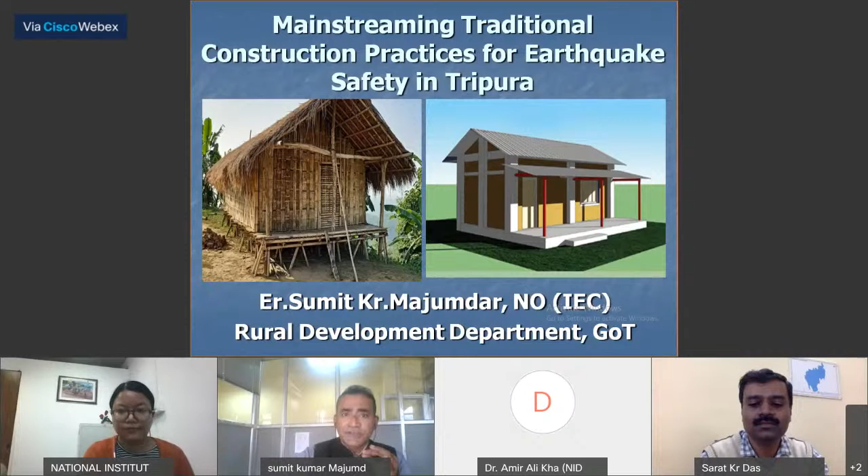Today, my topic is mainstreaming of traditional construction practices for earthquake safety in Tripura. This is the brief about my state. Tripura, excuse me, just.

Tripura is located in the southwest extreme corner of the northeast region with 10,492 square kilometers of geographical area, out of which about 60% is covered by hilly and forest lands. Tripura is a landlocked state surrounded by Bangladesh with an 856 kilometer international border, 53 kilometers with Assam, and 109 kilometers with Mizoram. And this is one of the smallest states in the country,

having a communication bottleneck and situated in a highly disaster-prone area under Zone 5, with a high population density, second highest in the northeastern region. Apart from all these constraints, Tripura is one of the best states in our country in rural development, health, education, and agriculture. Tripura lives in villages, as the rural population forms 82.94% of its total population of around 36 lakhs, as per census 2011. The average annual rainfall is 2200 mm.

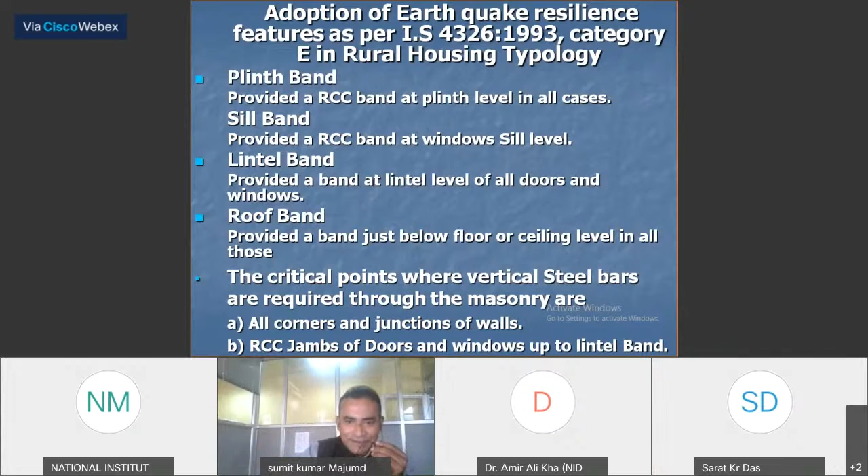So that stick will resist me and keep me from falling down. So in that case, one corner reinforcement will also give the same strength to that building. Because the bands are going through that corner reinforcement, it will give a good, resilient structure during the earthquake. So we have adopted this sort of technology over there.

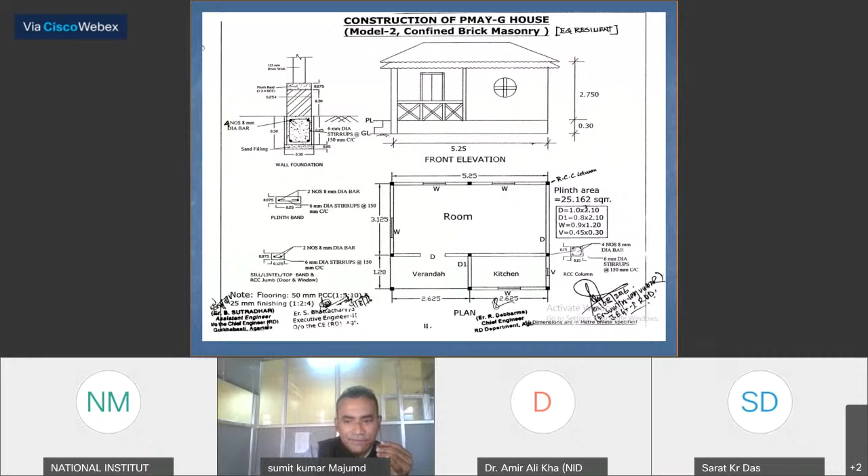We have developed this typology, PMAY-G houses, and we have circulated that. I have talked to you in this regard earlier. So we have circulated these designs. All 6 models have been circulated to the grassroots level people, and people are adopting these things. These are the designs. The plinth area of 25.162 square meter is within the permissible limit, and these are the structural designs we have circulated to them. These are all the models I have shown.

Surprisingly, we have seen ownership has been developed in PMAY-G, Pradhan Mantri Awas Yojana Gramin. In concept, people are using their own funds to develop better house construction. We have given only one reinforcement in the corner, but people are using RCC columns with at least four reinforcements, which is a good thing we have come to know.

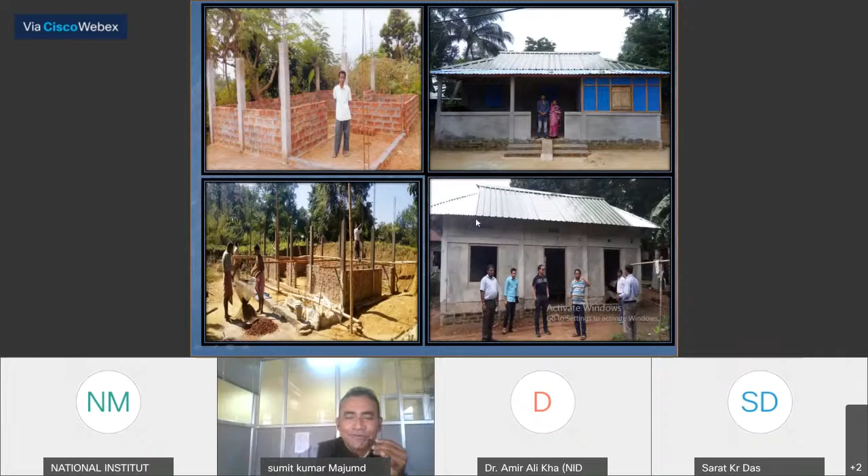And in our state, people are very much fond of bigger houses. And we cannot ignore that part either, because people used to stay in kacha houses in traditional practice. Now they are having a dream of staying in pakka houses. So bigger houses are very much in demand. So here also you can see the bands they have provided. And roofing is basically GCI roofing. You can see the transformation.

This is the earlier house of the beneficiary. See, kacha bamboo walls with mud up to window sill level. There are mud walls which are already broken. And now he is having a very pakka house. So I have given lots of examples of before and after. There is GCI sheet walling with simple wooden and bamboo pillars, and that was the earlier condition, and now he is having a pakka house. And this is also an example. You can see that condition, bamboo houses, now pakka houses.

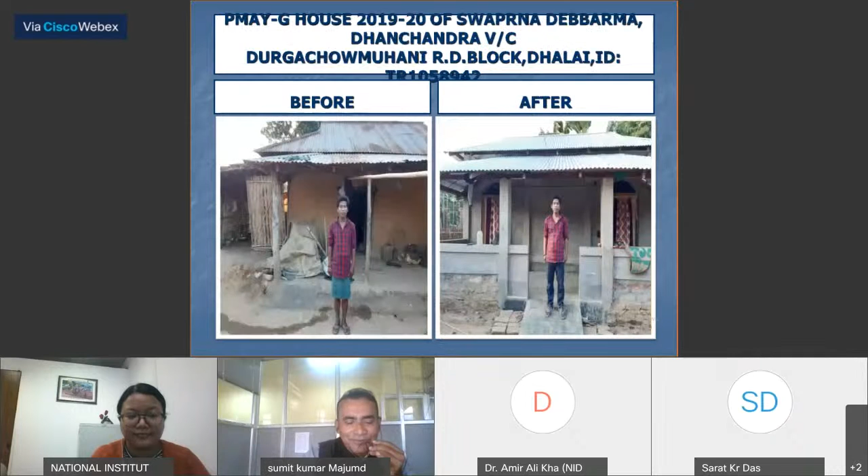That is a tong ghar. Primitive tribes used to stay in those tong ghar houses. Now they are staying in pakka houses. Here also, mud wall houses, you can see. Now he's having a pakka house. So under PMAY-G, we have developed this, and now people are using this concept. At least they are making disaster resilient structures. And they are also involving their own funds in that house.

Government is giving 1,30,000 in 3 installments, and they are constructing their houses with that amount. And we have seen that people are also using their own money to develop a better house, a bigger house. From 25 square meters, somewhere you will find 40 square meters of building.

That is bamboo walls and mud walls, now this stage. And it is typical in Mohanbhog RD block. That lady had no house actually. That is GCI; it's basically a zero house. Now she is having this house with IHHL toilet blocks also, and it is compulsory in PMAY houses. One toilet block has to be there.

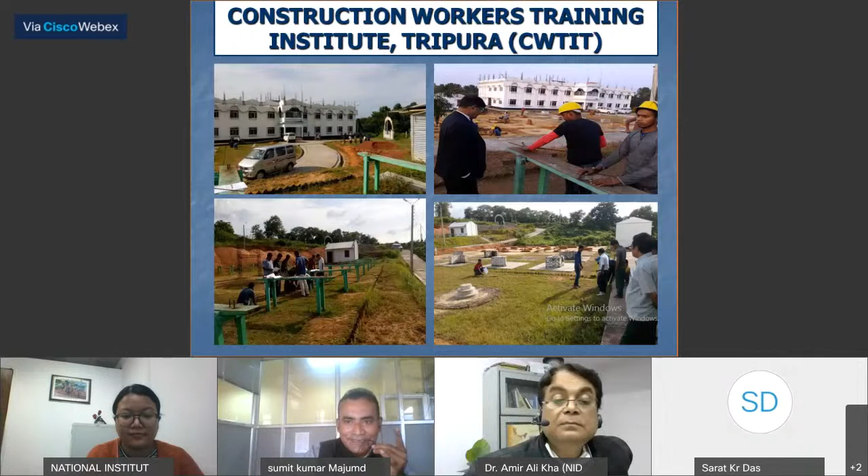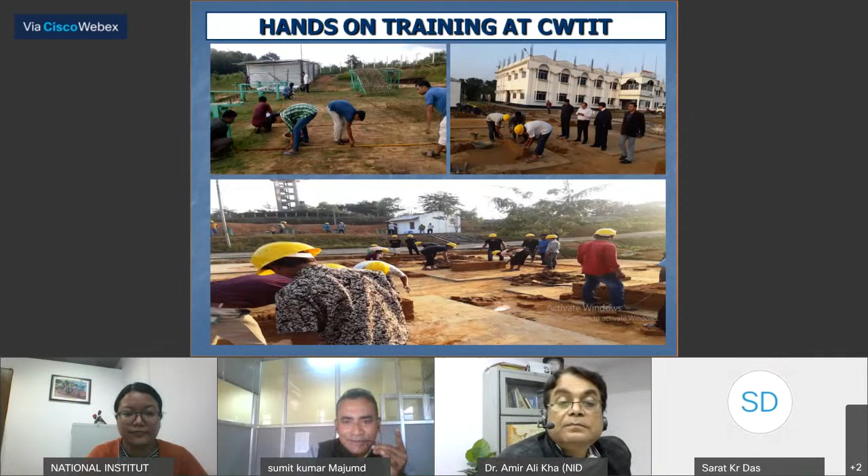And now, what construction skill development initiatives have been taken by the state: we have developed this Construction Workers Training Institute, Tripura, in Khumulwng under West Tripura district. This is the training institution for rural construction workers. They are taking in-house training and also field training. This is the workshop training they are using.

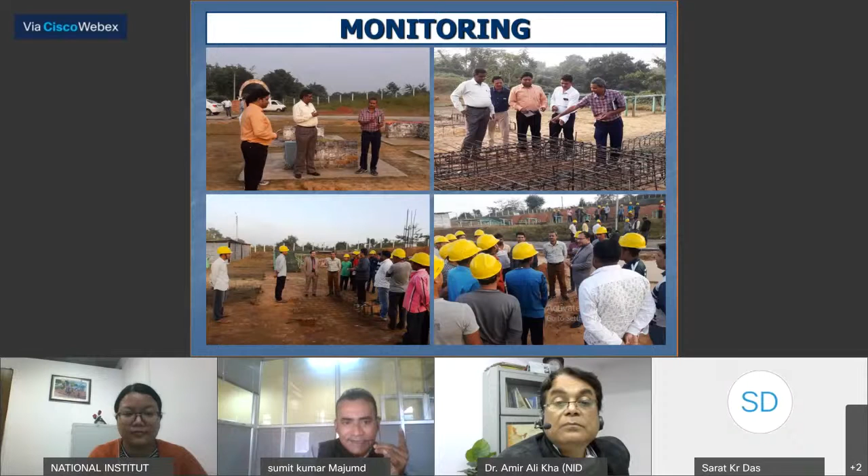At district level, rural mason training is also being done in various districts, and certification of rural masons is done to develop safe construction practices. Now, what we have used is appropriate technology with alternative building materials in the rural housing sector also. We have done this practice with the involvement of UNDP, Government of India, basically MHA.

We have taken this initiative in the 2015-16 financial year to develop some alternative building materials in the rural housing sector. We have identified treated bamboo based technologies for walling and roofing, stabilized mud block based technologies for walling, and rat-trap bond masonry technology for walling.

Bamboo based engineering material. Bamboo can be a very good engineering material. We know that Tripura is the second largest in bamboo production in the northeastern region, and bamboo has a very good tensile strength. Its fiber strength is just like steel. It's almost 650 MPa. So if we treat the bamboo in a proper manner with a proper chemical treatment, then bamboo can be used as a very good construction material.

And stabilized mud block. A stabilizer is used for stabilizing the mud block. We use basically 5 to 7% cement. Stabilized mud block is an alternative to burnt bricks, because burnt brick cost is too much in the state. So if we can develop some alternative building materials instead of burnt bricks, it will be very beneficial to the rural poor people.

So in that concept, we have developed this SMB machine. We have bought some SMB machines. We have trained in the district level, and this SMB size is almost equal to 2 burnt bricks, and costing is coming almost half of the burnt bricks.

And it is also environmentally beneficial because SMB requires only tilla land, means hilly land of red soil, but fertile cultivated soil is required for burnt bricks. So in that case also, it is very much beneficial. So using stabilized mud block is very, very important. I believe it can be done in Tripura.

Rat-trap bond masonry technology is also important because people are using burnt bricks very commonly. If we construct the walls with English bond or Flemish bond, 390 bricks are required per cubic meter of wall. But in rat-trap bond of the same thickness, basically a cavity bond, only 280 bricks are required. So we are reducing the consumption of bricks.

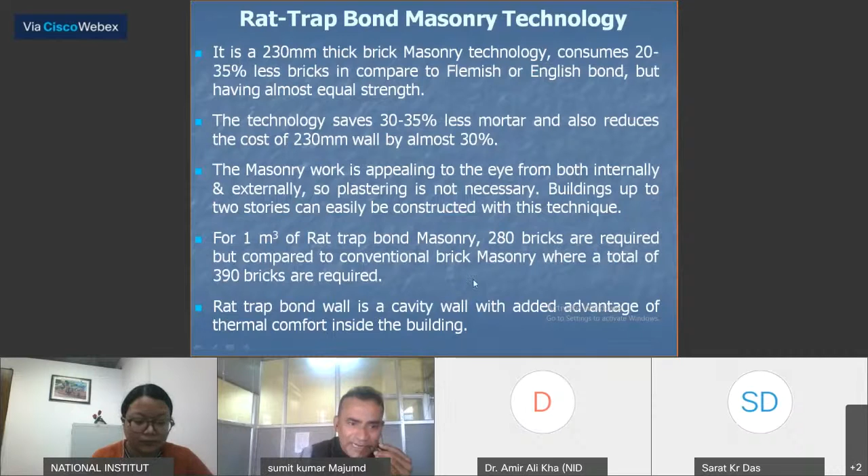The technology saves almost 30 to 35% mortar and cost for the same size of walls, and it's a cavity wall, so thermal comfort is also there in the building. So it's a very good concept. So we can adopt this sort of thing.

So we have done this practice in Sepahijala district, and we have used this technology, developed with the help of Dr. P.K. Das, UNDP consultant. We have developed 4 models. First of all, we have trained the local artisans in the bamboo treatment concept, how they can do things, training on bamboo treatment and truss making.

Truss is very important because people are using GCI sheets. So under a GCI sheet structure, one truss has to be developed. Previously in Indira Awas Yojana, the truss was made of iron, tubular black iron pipe. Now we can change this with bamboo trusses with proper jointing. So here we are showing how we are doing these joints with nut and bolt joints and tying with cane strips to resist the shear forces.

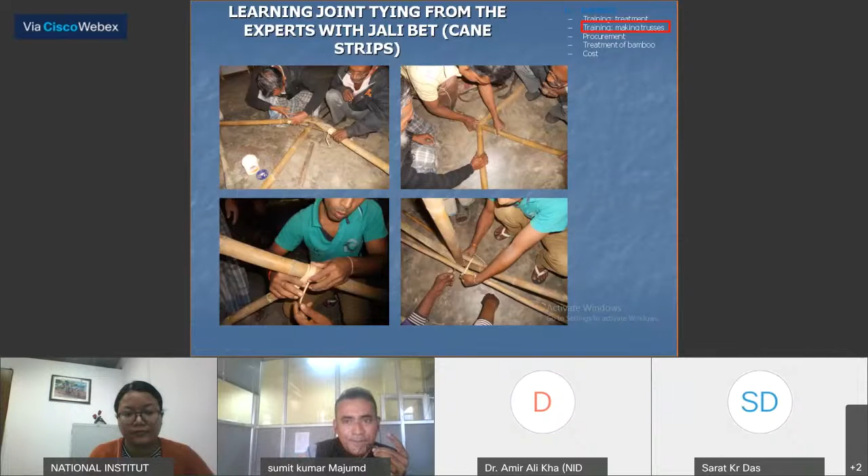Here we have developed this bamboo truss first, and then we identified from where the bamboo can be procured. We used Konokai bamboo, a very straight and solid bamboo. We identified the area where it is very much available, Tulonaran area, procured it, and treated the bamboo with CCB treatment, copper, chrome, boron. Now you see the sap is coming, means sugar is coming from the bamboo, and sugar attracts termites. That's why bamboo decays.

Sumit Saab, we have to conclude it. Yeah. Just conclude. We have already exceeded too much time.

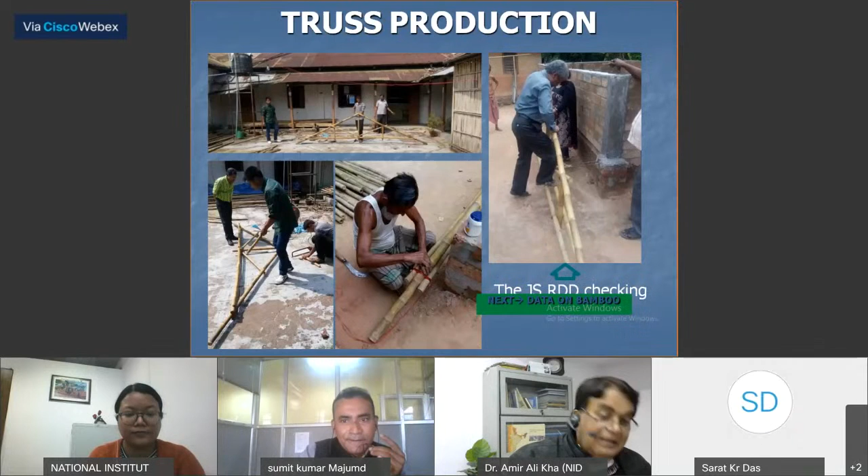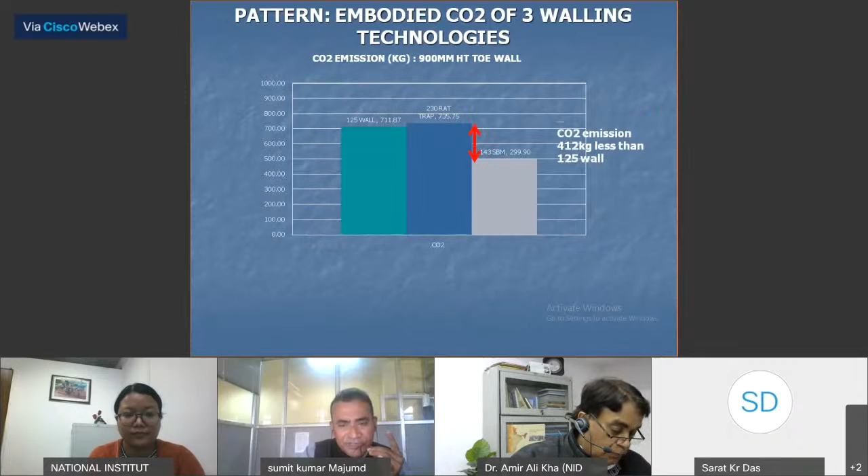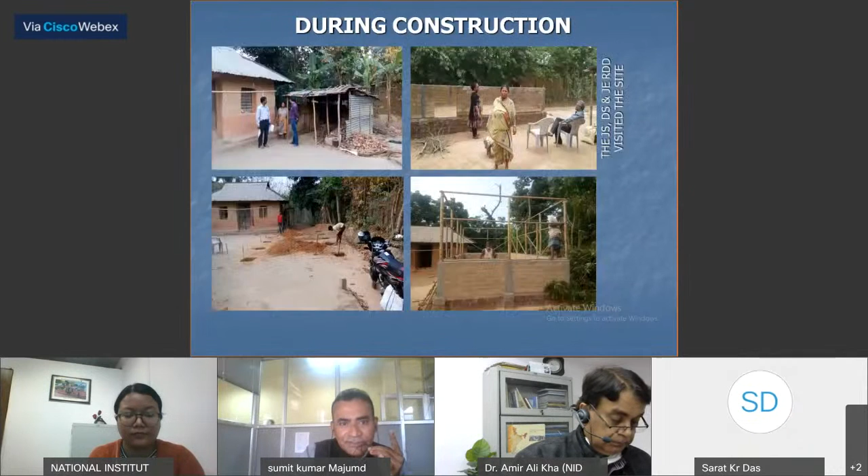Okay. And this is the truss we have done, and this is where the SMB training has been done. I am skipping the part on how cost is saved compared to other building walls and how carbon emission is saved. We have developed these models, demonstrated them to the rural poor people, and done the construction practice. See the stabilized mud block walls, how it has been done.

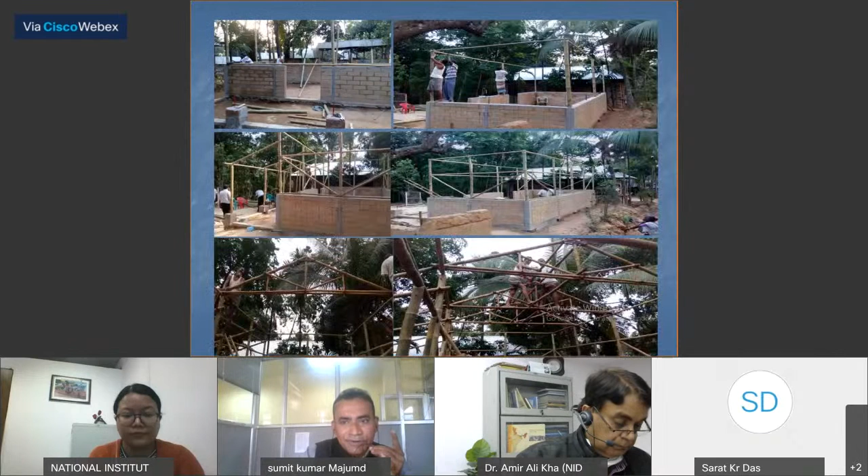This is the whole construction, what we have done. This is the costing, which is coming to 1,30,000 only, and within 31 days this construction has been done. And this is the truss, and these are the innovative buildings we have made with innovative materials, and it has been demonstrated in Agra during the launching program of PMAY-G, and our Honorable Prime Minister appreciated our initiatives.

Thanks a lot. Before starting my presentation, I have shown one Tonghar. This is basically a Tonghar. Now, this is the transformation of the Tonghar. Now he has made a Pakka house, so that's why the transformation is made. Thank you. Thanks a lot.

Thank you, Sumit sir. Before Yogita takes over, I have just one or two queries. One is, why is this Tonghar on stilts? Because it is a common practice. They used to stay in the jungle areas, so wild animals used to come, and they also keep their piggery, goatery, and duckery in that only. That is a common natural practice in Tripura, actually.

And what is the exclusive use of this Tonghar? And now, actually, in the primitive tribal group program, sir, we have already taken the initiative to develop 1,600 Pakka houses replacing this Tonghar. Actually, the Tonghar is not durable enough, sir, so we have taken this initiative to develop Pakka houses for them.

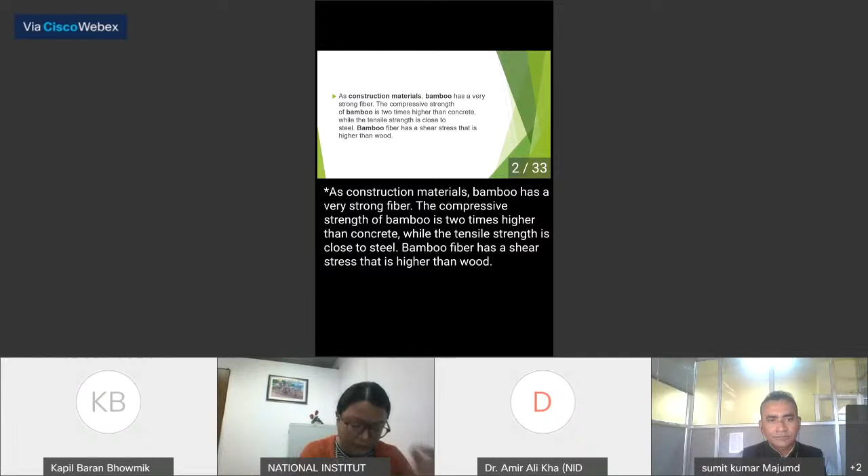The compressive strength of bamboo is 2 times higher than concrete, while the tensile strength is close to steel. Bamboo fiber has a shear stress that is higher than wood. That means in the same material, we will get the compressive strength of concrete and tensile strength of steel, as well as the shear strength of wood also.

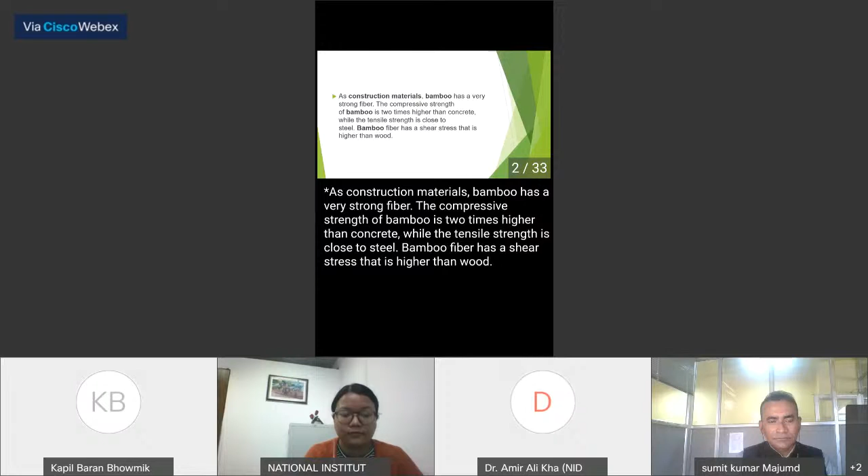Bamboo as a building material. Bamboo has been used since ancient times as a low-cost material for houses, bridges, etc. Recently it started appearing in designer homes as flooring, walling, and paneling materials. Particularly in interior design, bamboo is nowadays a very popular material. It is actually viewed as a poor man's building material, and it is also very unpopular in conventional constructions due to low durability, lack of structural design data, and exclusion from building codes.

Because, we all know, the durability of bamboo is very less, and at the same time we do not have that much structural design data at present, and also bamboo is not present in building codes in that way. So these problems with bamboo are still there.

Some facts about bamboo. Bamboo is a perennial grass and not a tree, as is commonly perceived. Normally people think bamboo is a tree, but it comes under grass only. There are almost 1450 species of bamboo available throughout the world, but all of them are not used for construction purposes. And the unique thing about this material is that it is one of the fastest growing plants. Its growth rate ranges from 30 centimeters to 1 meter in 24 hours.

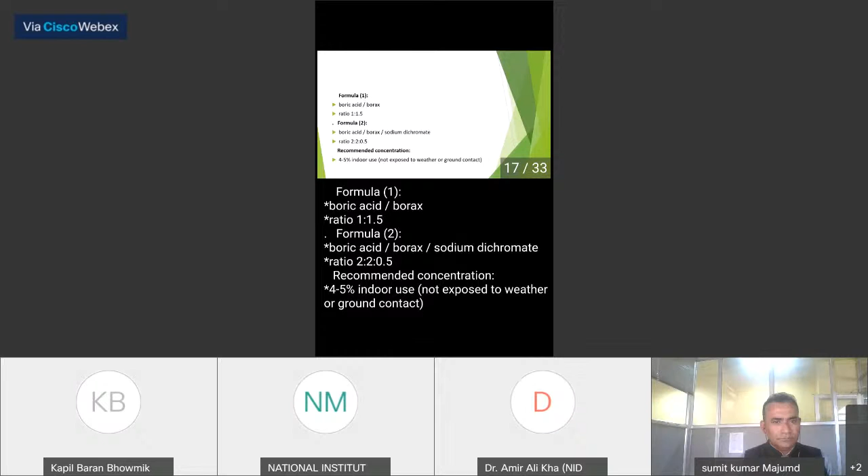Now the fixing type of preservatives. These chemical bamboo preservation formulations are proportionate mixtures of different salts which interact with each other in the presence of bamboo and become chemically fixed. In principle, the degree of fixation and efficacy depends upon the nature of the components and their combination and concentration. So these salts will interact with each other in the presence of bamboo, so ultimately it will fix to the bamboo.

For example, chromium is responsible for fixation. Copper is effective against decay, fungi, and soft rot. And the third compound acts against insect and fungus. That means the chromium part is responsible for fixation, and copper is effective against the decay by fungi and soft rot. And the third compound, this is the arsenic part, which will take care of insect and fungus.

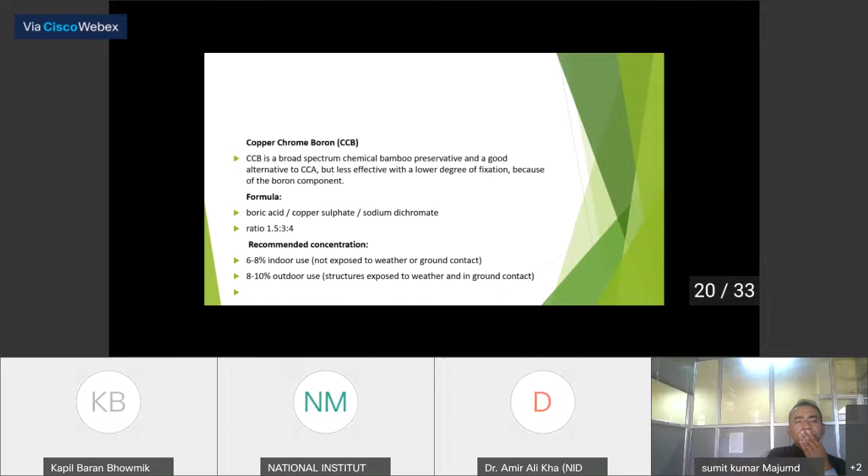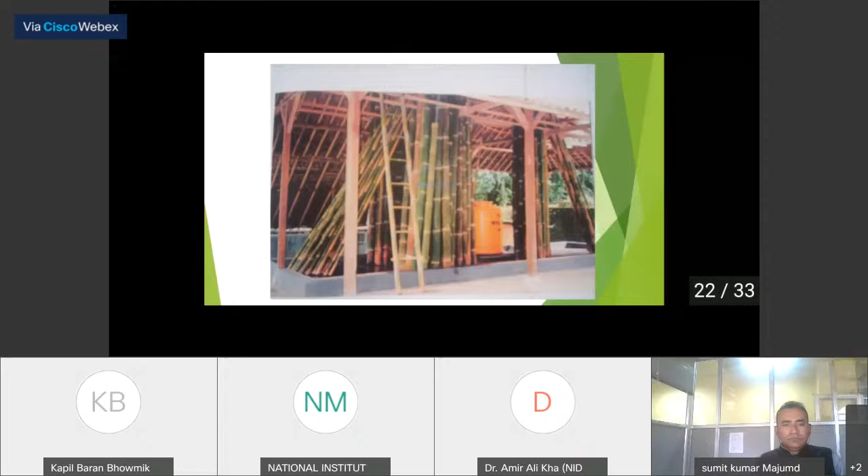Copper Chrome Boron, CCB: in place of arsenic, boron will be used. So these are some slides of this treatment. This is a spray of these chemicals on the stacks of bamboo, where bamboos are stocked. This is another process where a water tank is used, with the chemical solution in it, and bamboo will be stood in this way. Due to capillary action, the solution will go upwards, and ultimately it will be wholly soaked by the bamboo.

And some improved systems for joints. I will show some pictures only. So these are some improved systems of joining. Now bamboo houses with improved technology: adopting proper treatment process for bamboos used in construction of houses, proper joints and bamboo trusses, use of Bamboo-Crete ferro-cement technology in walls, and use of resin bonded bamboo mat corrugated sheets for roofs. These are the improved technologies being used for bamboo constructions.

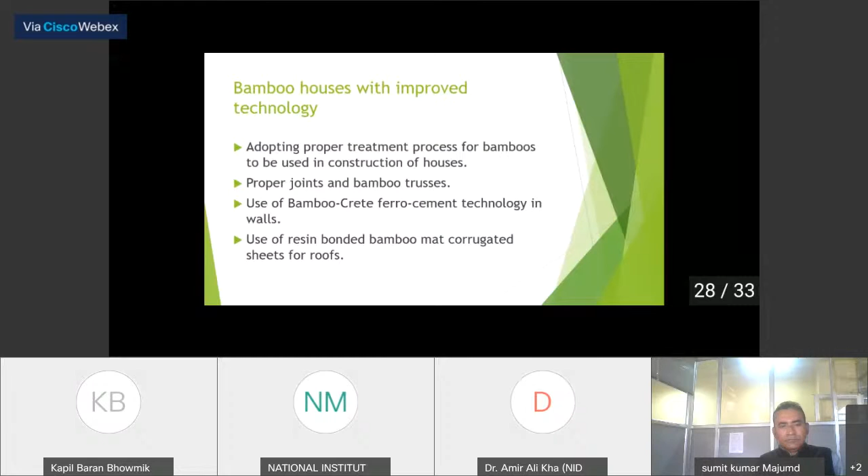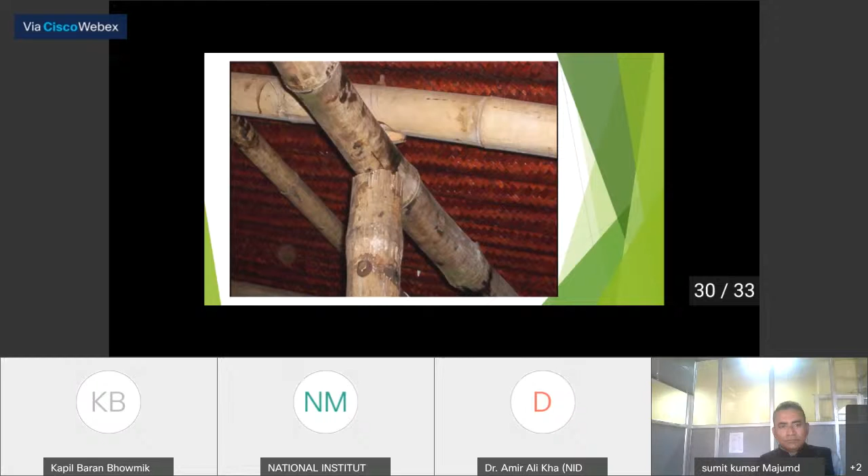I am showing some slides with these technologies. This is the walling and the bamboo columns. The columns, if required, can be a combination of a group of bamboos also. And the walls are a combination of split bamboo and chicken mesh, then plastered with sand cement mortar on both sides. This is the joint of the roof truss. This is the structure of the bamboo house, and this is the completed house.

So in this way we can improve the traditional houses through proper treatment of bamboo, through taking up innovative techniques of bamboo, and also through imparting trainings to our artisans. So thanks a lot.

Thank you. Please go ahead.

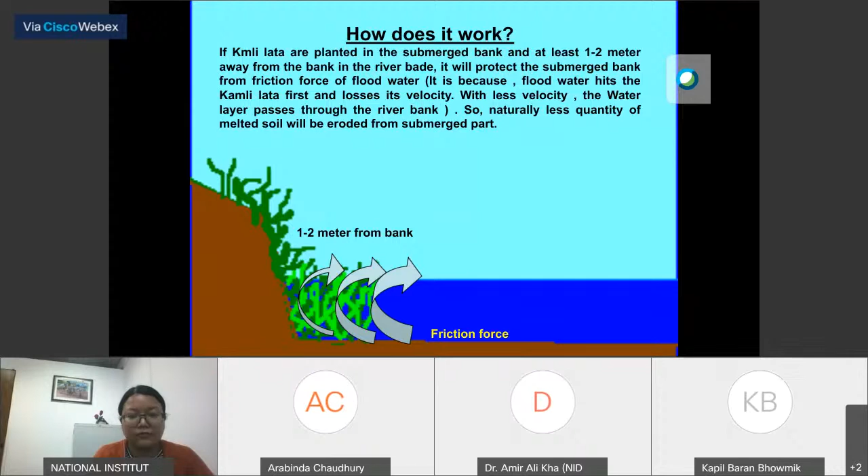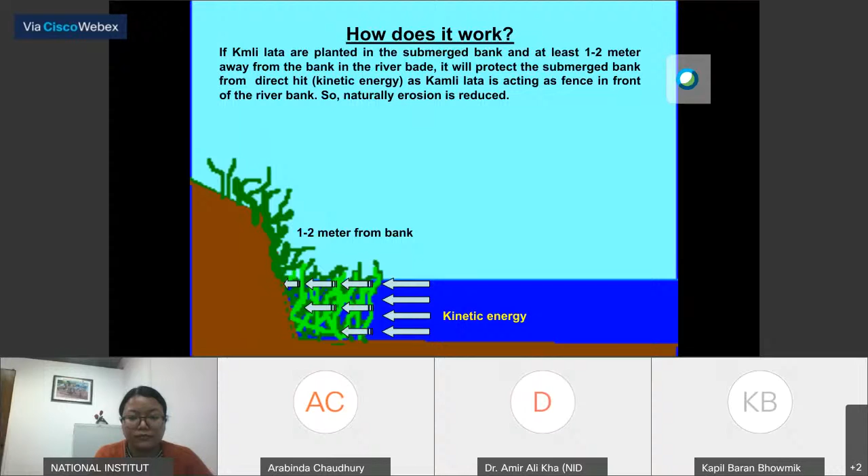Again, if Kamli latas are planted in the submerged river bank, not only the upper part of the river bank, then the direct hit is absorbed by the Kamli lata bushes first, because it is acting like a fence. So naturally, erosion is reduced. This strategy is being adopted by the community people of Tripura.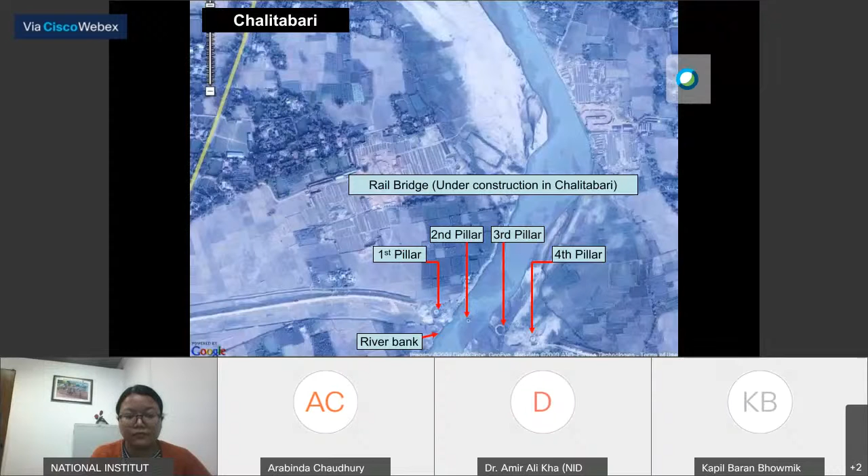This is again under Telemara subdivision, where Telemara railway station is. During the bridge construction, you can see there are 4 pillars in Chalitabari. The first pillar was in the river bank. The 4th pillar was in the river bank, but the 2nd and 3rd pillars were in the river bed. If you enlarge the image, you can see both pillars were in the river bed during construction of the rail bridge. Now, what happened?

Community people were continually planting the Kamlilata. Now see in 2009, after the bridge was constructed, the 2nd pillar and 3rd pillar have come into the river bank. Now it is not in the river bed. Means till the 2nd pillar the land was reclaimed. And when we measured, we found that 45 feet within 2 years is due to Kamlilata.

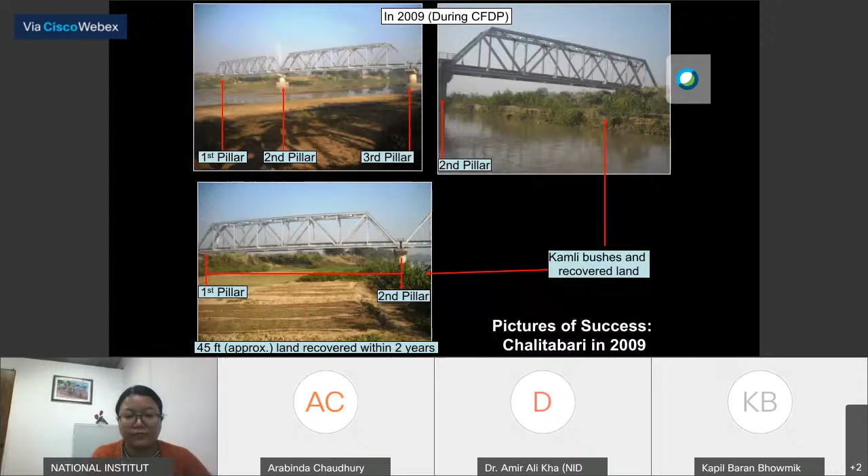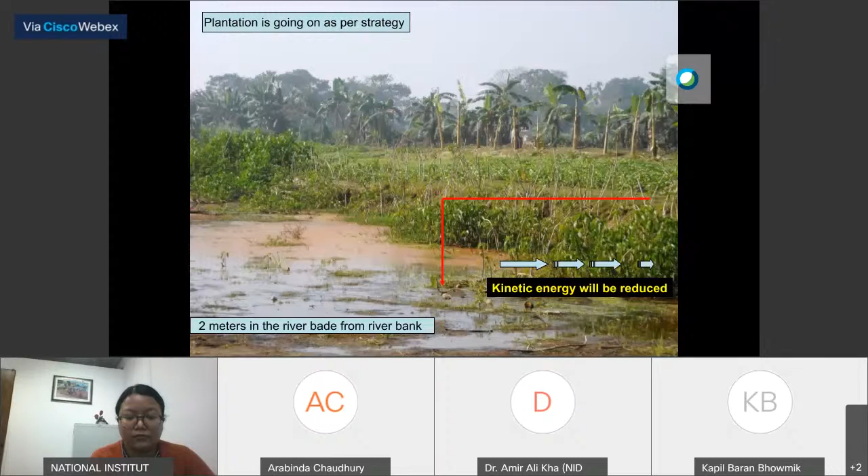And this is the present river bank. I am talking about Khowai River. See, the practice is going on. Community people planted Kamlilata 2 meters away from the river bank toward the river bed. It is reducing the direct hit of the flood water into the river bank during flood, which may cause erosion. Now the erosion has been reduced because the kinetic energy has been reduced by the Kamlilata bushes existing in front of the river bank. It is acting like a fence.

Because of the Kamlilata, friction force has also been reduced. So because of 2 reasons, erosion is being reduced. Here is the difference between the practice and the government schemes. In Kamlilata, zero cost is involved, no cost is involved. Kamlilata is available everywhere.

Families, Kamlilata, concerned families during the project, as Sharad Babu in the beginning session shared, that we are working with the community people. At family level, we are working. We motivated them to adopt the practice. Now, to save their houses, the community and the particular families were planting the special plants, Kamlilata, by themselves alongside the river bank, because otherwise their houses may get eroded.

So concerned families can continue the plantation following a simple strategy. What is the strategy? Just plant in the riverbed at least 1 or 2 meters away from the river bank into the riverbed. But in case of government projects, particular families are unable to continue. CC blocks they can't place. RCC porcupines a particular family can't place. In Kamlilata, no expertise is required, but to place those, engineers and skilled men are required.

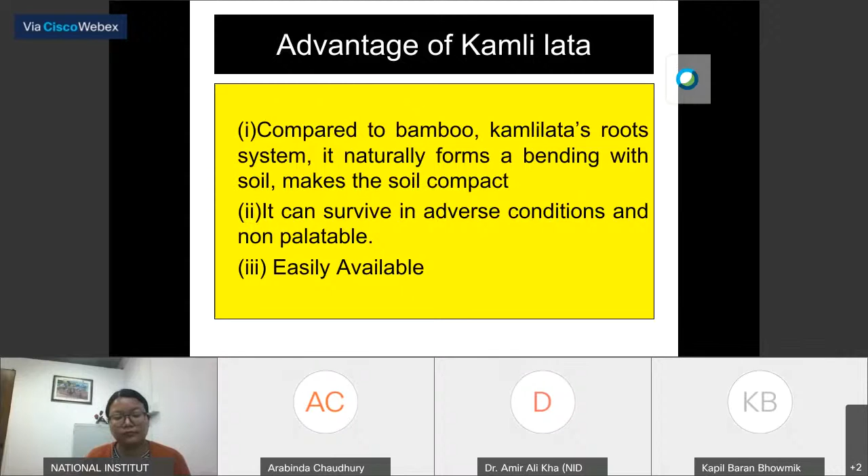Kamlilata is easily available. Everywhere it is available. If we compare with bamboos, Kamlilata's root system naturally forms a binding, a fence-like structure, binding the soil and making the soil compact. It can survive in adverse conditions also. It is available everywhere. Few minutes back also I shared that with you.

There are other uses of Kamlilata. The branches can be used as a fence. In Tripura, bamboos are there, but what community people are doing is using Kamlilata in their crop fields as a fence. They are making fences using this. They are not using bamboos. In comparison to bamboos, Kamlilata is much cheaper.

And these branches of the Kamlilata may be used as fuel also. They are used for cooking purposes. It is eco-friendly. No investment is required. And even the leaves can be decomposed and composted also. So these are the other uses or benefits of Kamlilata.